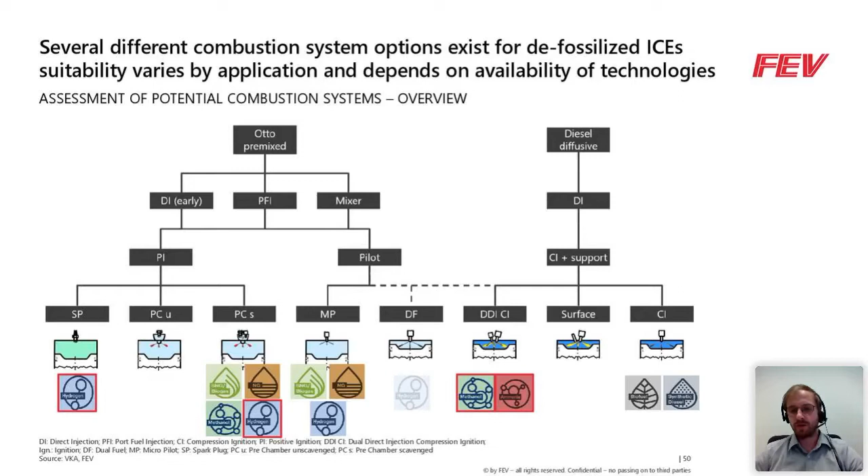And then what we also see very likely on the diffusive side are methanol and ammonia with a pilot-assisted diffusive combustion system. We are in this session going to focus on hydrogen on the positive ignition side mostly, and then also we will start with a section on methanol and ammonia for a diffusive combustion system.

For this purpose, we are starting with the fuel properties, beginning with the fuel itself, as especially ammonia is still quite unconventional as a fuel. Benedict has shown that there are already applications, of course. For example, in the war there was a bus operated on ammonia, and there are some pilot projects. However, I think for most it's still quite unconventional as a fuel.

Starting with the lower heating value, we can see here both for methanol and ammonia, we have a heating value which is roughly only half of that for diesel or MGO. But this lower heating value does not result in a lower energy content in the cylinder. We can see the mixture heating value is even increasing slightly. The main effect is to be seen here for the fuel tank size or fuel volume that we need for a certain energy content. So the storage is not included in these figures here. For methanol, we would need to increase the fuel volume by 130%, and for ammonia, this would be 180%.

Still, for ammonia, the storage density is its major advantage compared to, for example, hydrogen. The additional space that we require is only about 50% of that for hydrogen, and also the temperature for liquefaction at ambient pressure is only minus 33 degrees compared to hydrogen, where we have minus 253 degrees. So therefore, we will also require less insulation or less energy for reliquefaction of the fuel.

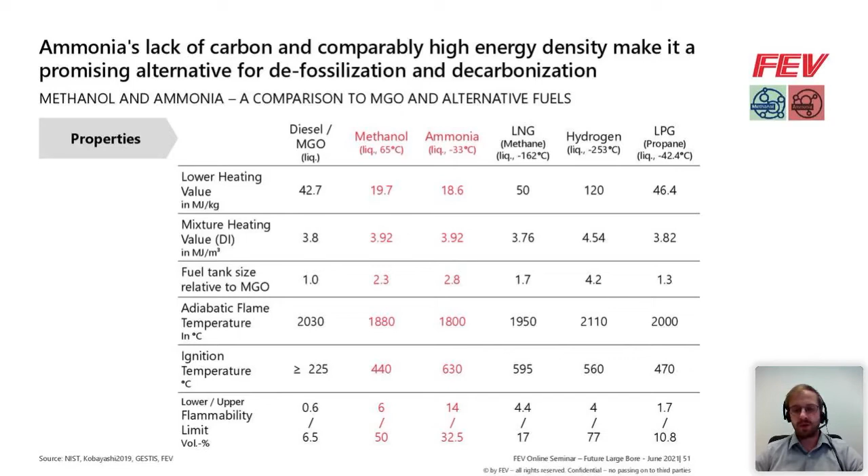Moving on to the more combustion-related properties, we can see here both for methanol and ammonia, we have a lower adiabatic flame temperature, which would be beneficial for our NOx emissions. However, for ammonia, we have to consider that we are burning a fuel that has nitrogen on board, basically. So we are producing nitrogen radicals, which will be worsening our NOx emissions quite severely. And then the ignition temperature and flammability limits: ignition temperature is higher for ammonia and flammability limits are very narrow. So there will be major challenges regarding combustion. We are going to have a closer look at this on the following slide.

For that purpose, we have depicted here ignition delay times and flame speeds. We are starting with the ignition delay times. In dark blue, we have depicted methanol. In light blue, it's methane, as a reference for natural gas, a quite knock-resistant fuel. In gray, we have ammonia. And in red, we have dimethyl ether as a reference for a diesel-like fuel.

If we look at methanol, we can see with a little bit of pilot support, so a little elevation of the temperature level, we are already getting close to diesel-like ignitability. So this is quite a good option for such a diffusive combustion concept. Looking at ammonia, however, we can see the ignition delay times are even longer than they are for methane. So therefore, we will require a lot more pilot fuel or a higher compression ratio, or a combination of both.

Looking at the flame speeds, we can also see in comparison to methanol or methane, the flame speeds for ammonia are about 6 times lower. So therefore, we will also have to make sure that we have, during our diffusive combustion, a quite high temperature level to ensure a full and complete combustion of ammonia, as from the fuel side itself, it does not really want to burn that well.

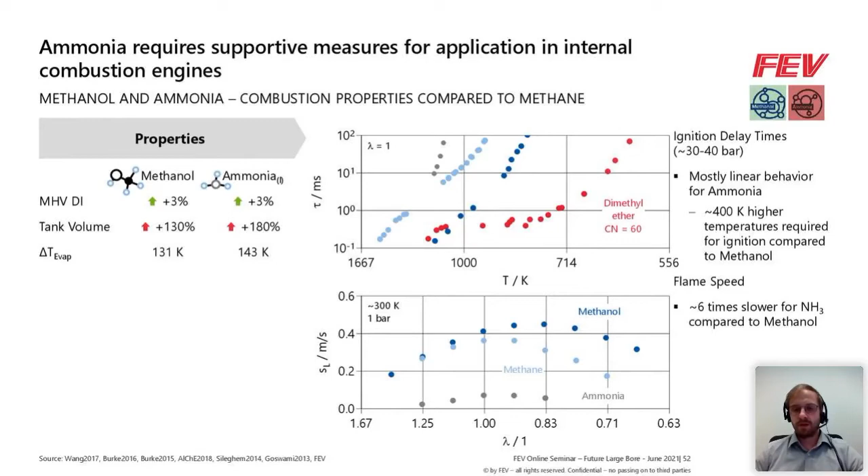Coming from the fuel properties, we can now have a closer look at the diffusive combustion system that we are actually aiming for with these two fuels. As the pilot-assisted combustion system may be unfamiliar to many people, we've depicted it here in 3 phases.

We are starting with the pilot injection. The pilot injection is from this first picture to the second one, being compressed to ignite. Then we have the pilot combustion in the second picture, and we can also start the main injection of our fuel, so ammonia or methanol. This main fuel is then compressed to ignite, supported by the elevated temperature that we are creating with our pilot diesel injection.

And then subsequently it's compressed to ignite, has a main combustion phase, and burnout of course. So really operating like a true diffusive combustion system, but with basically two direct injections and also two compression ignitions.

So what can we say already on this combustion system, just coming from the fuel properties? We've seen this on the ignition delay time. The pilot quantity for methanol will be much lower than for ammonia, and for methanol we had a quite comparable ignitability with a little bit of support compared to diesel-like fuels. So therefore we can mostly take over the combustion chamber here and also the compression ratio, while for ammonia it's likely to be a little bit higher.

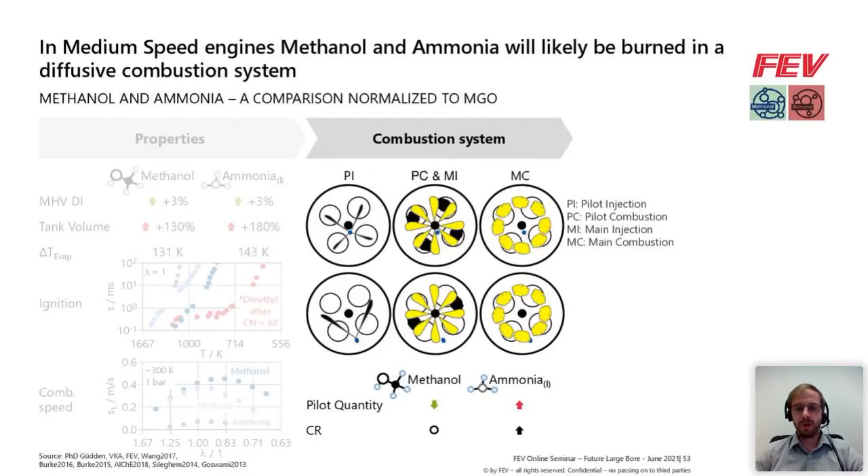What is basically the outcome of this regarding performance and emissions? So we have a short overview here of this. The baseline is the MGO, or diesel basically. So as with methanol, we have the same compression ratio, we can realize basically a similar load range with similar efficiency.

We have a severe reduction of the NOx emissions due to the lower adiabatic flame temperature, but also due to evaporative cooling of methanol. And then the rest of the emissions are basically very low, as we have a diffusive combustion system.

For ammonia, on the other hand, we require a higher diesel share, and maybe a combination of a higher diesel share with a higher compression ratio. So load range will be somewhat limited, and also efficiency is suffering a little bit from the early pilot injection. So this is thermodynamically, of course, not really ideal.

NOx emissions are increasing as we have fuel nitrogen, although the combustion temperatures are lower. But the major advantage of ammonia, obviously, is that we are inherently CO2 free. So CO2 emissions are only produced from the pilot injection.

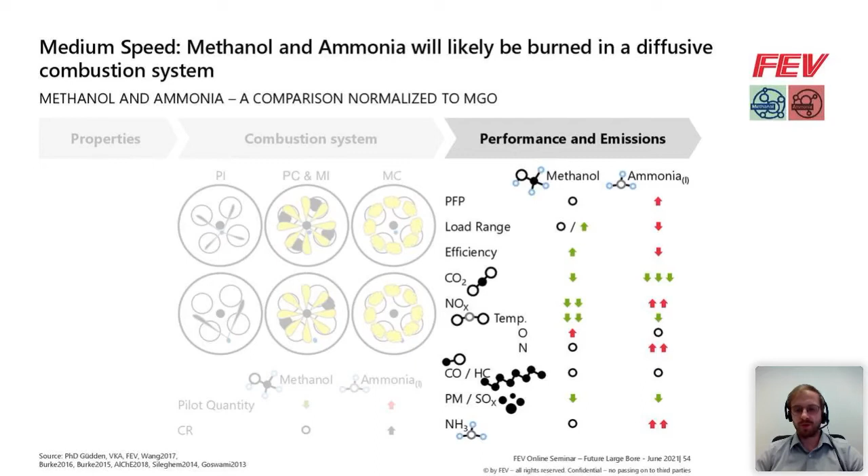So we are going to have a little bit closer look on this combustion system, with a few results from our testing on single-cylinder engines with methanol, and we are going to discuss a little bit what this could look like for ammonia as well.

So we are starting with a plot of the rotational speed over the bore diameter. This type of combustion system is maybe familiar to you from MAN's ME-LGI low-speed engines, or from Wärtsilä's gas diesel engines, which are operating with a similar principle.

And we have, with our single-cylinder investigation, scaled this combustion system to heavy-duty and high-speed engines. The major challenge for such a combustion system, as we have two fuels and two compression ignitions, is of course the time frame that we have for our combustion. So therefore, higher engine speeds are really a challenge, and we have scaled this to these smaller engines, but we feel confident to apply it also to at least the smaller medium speed engines.

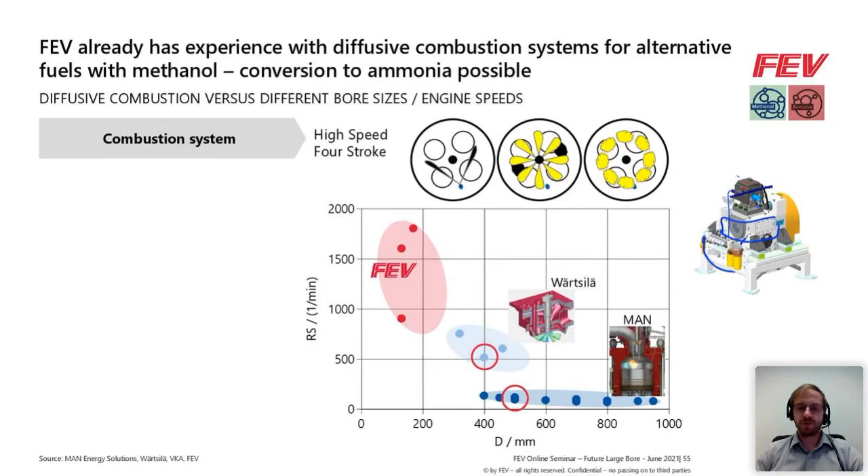So looking at results, we've selected to show here something on the heavy duty single cylinder engine. Of course, the size is much smaller than for the medium speed engines, but as mentioned before, it's really a diffusive combustion system, and therefore scaling regarding the engine size is not that much of an issue.

So starting with the results here, as mentioned, these results are on methanol, but we also have a direct comparison to a diesel baseline. So we can see here at first, even with EGR that we are operating the engine with for the heavy duty, we have a completely soot-free combustion.

So this might also be interesting for medium speed engines, especially with two-stage turbocharging, as we don't have to worry about soot impacting the compressor wheel. So this might also be an enabler for EGR combustion systems for some medium speed engines.

Then regarding HC and CO emissions, we can see we have a very low level, apart from the very low NOx emissions where we have a lack of oxygen basically. So we have really a true diffusive combustion system, and at the same time we can increase the efficiency with this type of combustion system by about 5%, while NOx emissions for methanol are reduced by about 60%.

So considering the properties of ammonia, a compression ratio in the range of 18 might be really the borderline of what we can go for, and we have to increase the pilot quantities. So therefore, efficiencies will most likely go down to the level that we see from the diesel engine, or maybe a little bit lower. But there will of course be ways to further improve this once we are really getting into this.

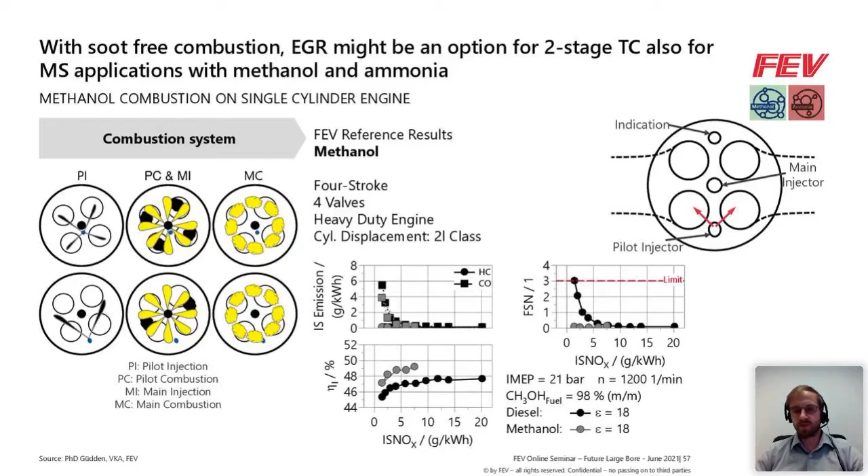So now we've focused quite a lot on methanol and ammonia, and it's time to move on now to hydrogen. We've said in the beginning that we want to focus also on hydrogen, and for that purpose we are actually going back to the matrix that we've shown initially and are going through the combustion systems in a little bit more detail.

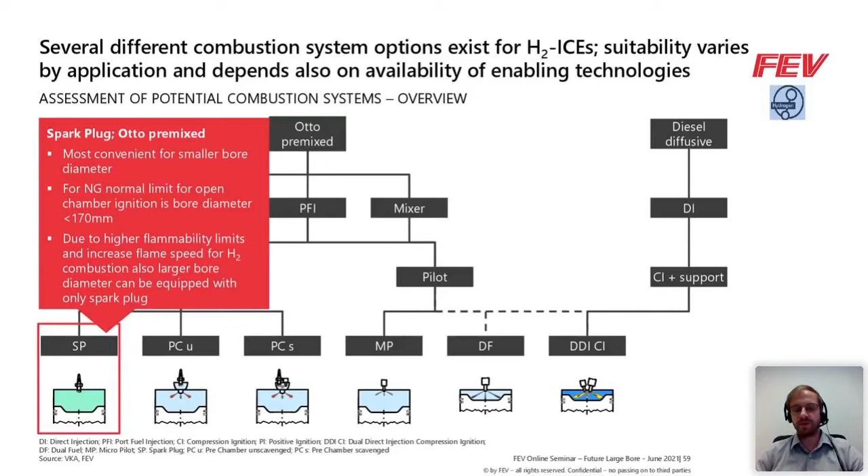As stated in the beginning, for the hydrogen internal combustion engines, we see the possibility for the smaller medium speed engines to also go for an open combustion chamber, as we have a much higher flame speed compared to natural gas. So this is basically shifting the limit for an open combustion chamber. But flame speed is not infinite, so therefore pre-chambers will also have their place for the hydrogen internal combustion engine.

For natural gas, usually a limit is somewhere in the range of 170 millimeters. For hydrogen, we think it could be somewhere in the range of 250 millimeters. For some applications, maybe a little bit smaller. For others, maybe a little bit larger bore diameters.

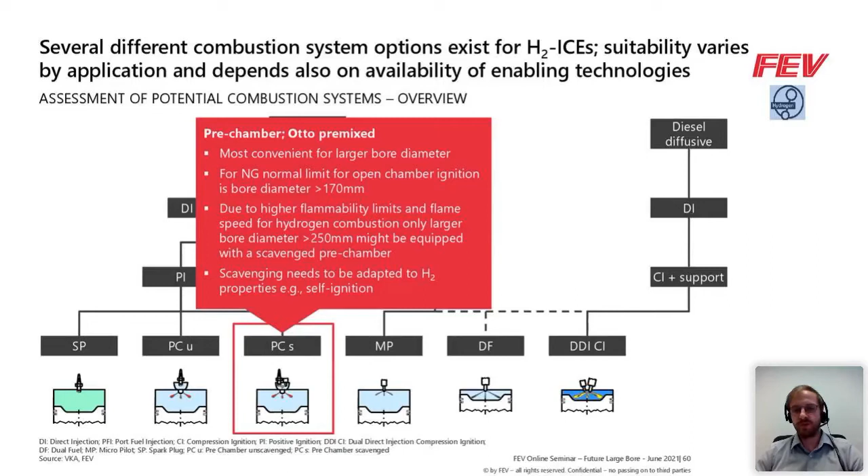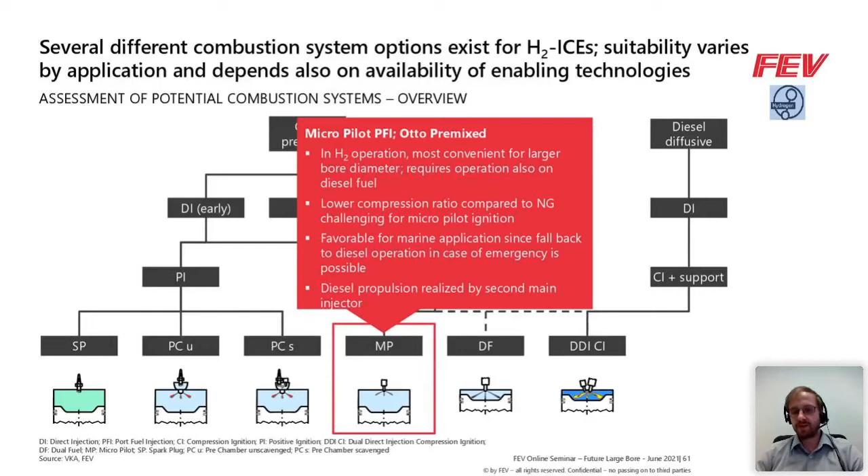Then the micropilot concept might be a very good option also for hydrogen, as it is already a very good option for natural gas. And we can realize a fuel redundancy with a second main diesel injector, which is of course beneficial, for example, for marine applications. However, for the micropilot concept, we have to think about the compression ratio, as if we need to go down for hydrogen to avoid knocking combustion with the compression ratio, we have to be careful that we still can realize a good ignition quality of the micropilot.

Then the DF or fuel sharing concept, we've mentioned that in the beginning, this might be an option for the hydrogen combustion engine, as we don't have the issue that is associated with such a type of combustion system with HC and CO emissions. But this is, of course, just then the entry to the hydrogen internal combustion engines.

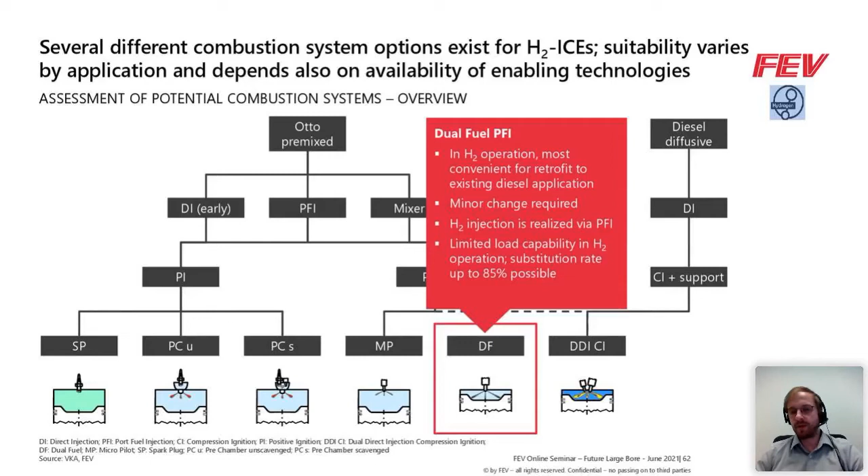Regarding diffusive combustion, we don't see this at this point as very likely for hydrogen, as we require a high injection pressure, so above 300 or 400 bar. Therefore, we would require a compressor or a cryogenic pump to really realize this with hydrogen, and we think it will be more in the direction of positive ignition or micropilot ignition for that reason.

On the positive ignition side, we are going to have a short look at some of the results from our heavy duty and medium duty engine testing. Of course, much smaller, and scaling is not as easy as for the diffusive combustion system. But this slide is really summarizing the main challenges that we have with the hydrogen internal combustion engine.

So on the left side, we have heavy duty results, which are comparing direct injection and port fuel injection. We can see we have a really severe reduction of the boost pressure demand for the direct injection. This is why hydrogen engines will most likely go for direct injection, at least in the longer term, as we really have a lot to gain regarding the boost demand here.

However, this comes with a downside. We can see here on the NOx emissions and also on the efficiency, the NOx emissions are much higher and efficiency is lower for this operation strategy. So we have operated with a boost pressure equal to the back pressure.

So therefore, the mixing is really suffering with the direct injection, as we are having a low pressure direct injection, in this case around about 15 bar. And mixture formation optimization is the key to basically meet the full potential for the direct injection, that we not only have the benefits regarding the turbocharging or the boosting, but also that we are meeting the PFI layout, and that we can then translate the benefit regarding boosting also into higher efficiencies.

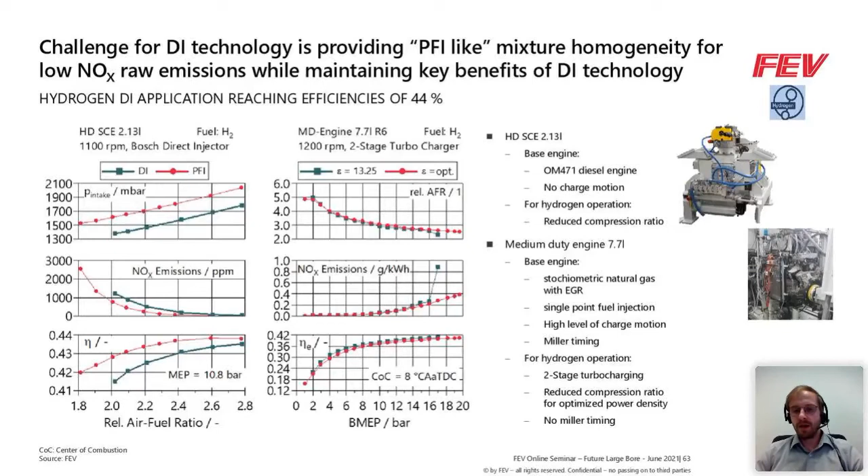So in comparison to a natural gas baseline, we maybe reduce it a little bit to have more room regarding knocking combustion. For that purpose, we utilize a comprehensive toolchain from 0D to 3D that we've also validated with our test results.

So we are starting 0D with a kinetic entrainment model to optimize the compression ratio. Then on the 1D side, we have valve timing optimization and turbocharger optimization on a full engine. And then of major interest, which we are going to focus on a bit more in the next two slides, the 3D CFD mixing simulations, which is especially important for direct injection.

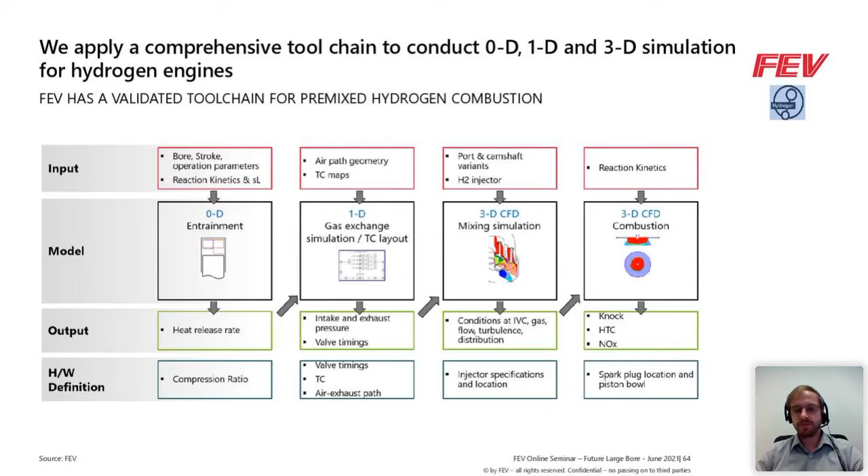But we also do 3D kinetic simulations, so combustion simulations, which can also serve as an interface to engine mechanics and so on. So as mentioned, focusing on the mixture formation, this will actually be the last part of my presentation, and then I will give it over to Max.

We are seeing here three different cases for the hydrogen direct injection engine: central direct injection, which might be a valid option for the smaller medium speed engines where we are igniting the mixture with a spark plug, and where we could be able to place a spark plug and injector in the central position; and then two side injection cases. For pre-chamber layouts, for example, it will be very challenging to fit both a pre-chamber as well as a hydrogen direct injector in the middle.

In the case of side injection, one time we have it without swirl and one time with a swirl number of 1.5. Starting with the central injection case, we have a quite uniform distribution around the center axis. And if we consider that we might be able to ignite the mixture also in the middle with a spark plug, this could be a beneficial solution.

For the side injection cases, we have severe challenges for the mixing. We can see also that charge motion, so swirl, is not having a major impact on this. Therefore, the optimization of the spray formation, of the spray targeting, but also of the interaction with the piston is really important. We can see we use the piston to redirect the spray here. These are, of course, not the optimized solutions, but just examples, so there is a lot of potential that we can utilize with further optimization.

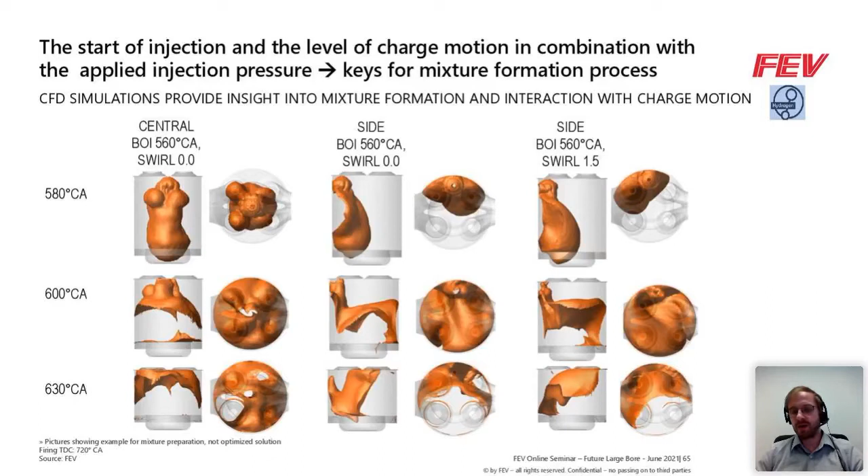Finally, having a look at the mixture formation at spark timing, we can see in the central case, we have in the compact bowl of the heavy duty engine a richer concentration, which is beneficial for a fast combustion speed, while we have major stratification in both side injection cases, which would result in slower combustion, but also higher NOx emissions, as somewhere we will also have quite rich spots.

So therefore it's really very important for a hydrogen direct injection engine to utilize the full potential. For that purpose, it's very important to have a validated spray model to, for example, as shown on the right side, also be able to predict the interaction of the injection with the charge motion and so on very well.

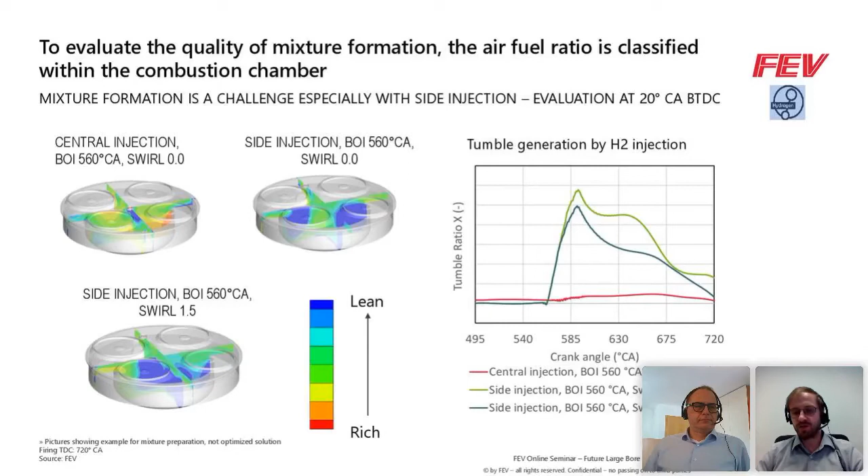Many thanks, Arne, for that compact overview of the thermodynamic background. Now we come to the translation of this thermodynamics to engine hardware. As we can see here, methanol and ammonia can generally be seen in their behavior and requirements comparable to diesel. Especially ammonia needs even higher compression ratio and peak firing pressure capability. Hydrogen and natural gas benefit from higher boosting.

For hydrogen, we see a spark-ignited combustion with a lower pressure for direct injection. For the diesel-like combustion systems for methanol and ammonia, SCR will still be needed. For hydrogen and natural gas, it will depend on the legislation to be applied if and which EATS will be needed.

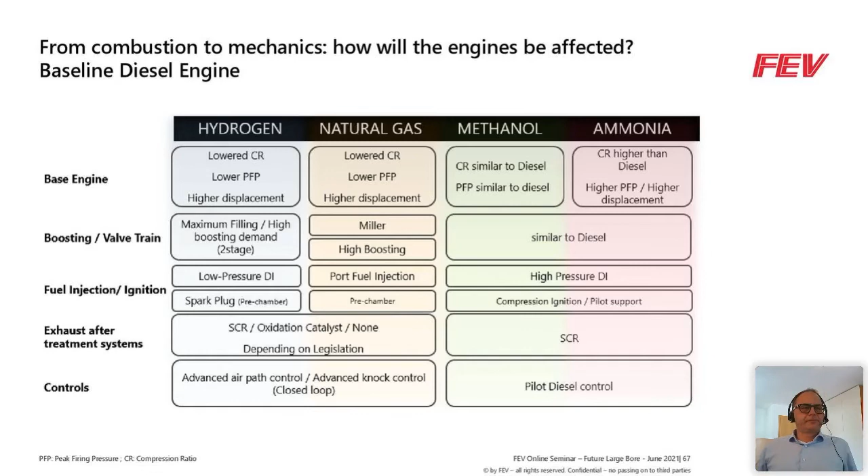So to step into more concrete detail, I would like now to show how existing dual fuel engines using natural gas and diesel as fuels are already a very good basis to also burn hydrogen. What is needed is shown here on the right side. The example is taken from a normal dual fuel engine, and what should be changed if we want to run on hydrogen is the compression ratio, because we have a higher knocking tendency.

Also, the induction system needs hydrogen-adapted valves and a hydrogen-adapted fuel supply. The SOGAV needs adaptation for the lower volumetric heating value, and of course also the turbocharger, for the increased boost pressure demand due to the lower volumetric heating value of hydrogen.

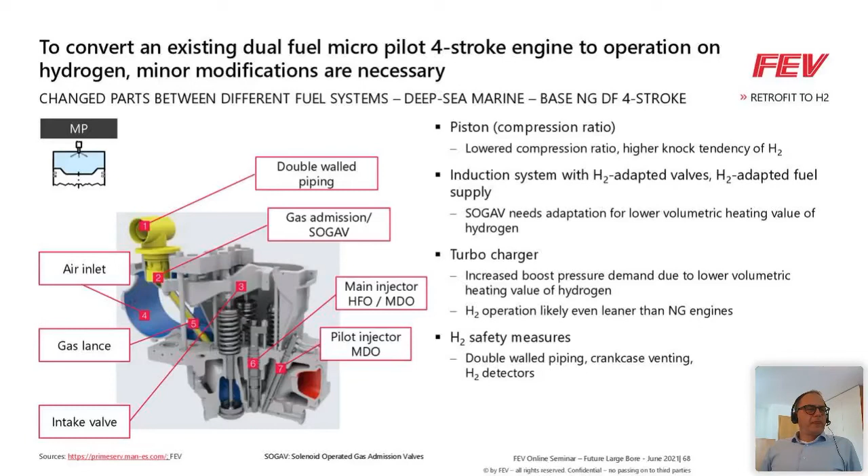What also has to be considered is that hydrogen operation is possible with even leaner lambda values, leaner fuel ratios. Of course, we also have to consider safety measures for hydrogen: double wall piping for marine application, which is already usual, has to be considered, along with crankcase venting and hydrogen detectors.

From today's perspective, future engines should be able to run on different kinds of conventional and alternative fuels, as we can see on this matrix here. It will be beneficial if engine architecture in general, and cylinder head architecture in particular, will be able to cope with that in an efficient and modular way. As we can see here,

we see methanol and ammonia with diffusive combustion will have a setup very similar to diesel engines. When we come more to the alternative fuels, burning hydrogen, we see that it will also come to scavenged pre-chambers, especially on bigger bore sizes, comparable to natural gas burning. And we also see premixed burning combustion systems for methanol, also with scavenged pre-chambers.

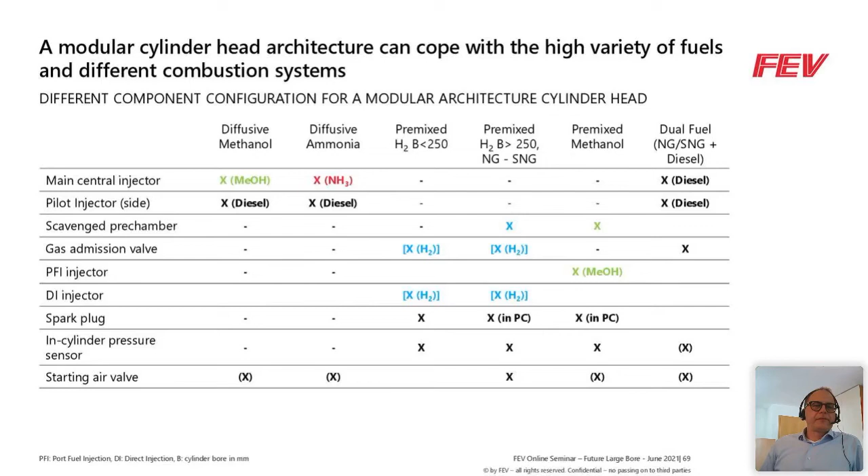So to show this better, we have here different mock-ups of important elements to be implemented into the cylinder head, which are needed to operate on different kinds of fuels. We start here with a normal diesel system mock-up, which is relatively lean and easy compared to what will be necessary to run on other fuels.

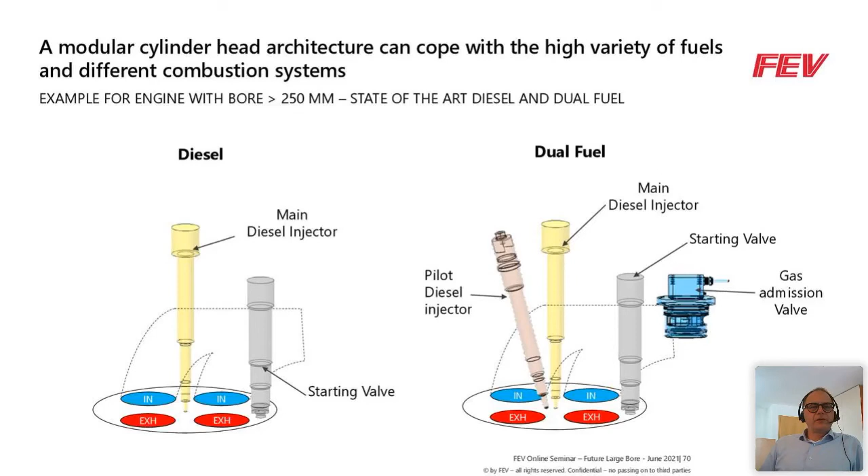On the right side, we see the dual fuel mock-up, where we have already added a pilot diesel injector and where we also have a gas admission valve to get the gas into the intake channels, the intake ports.

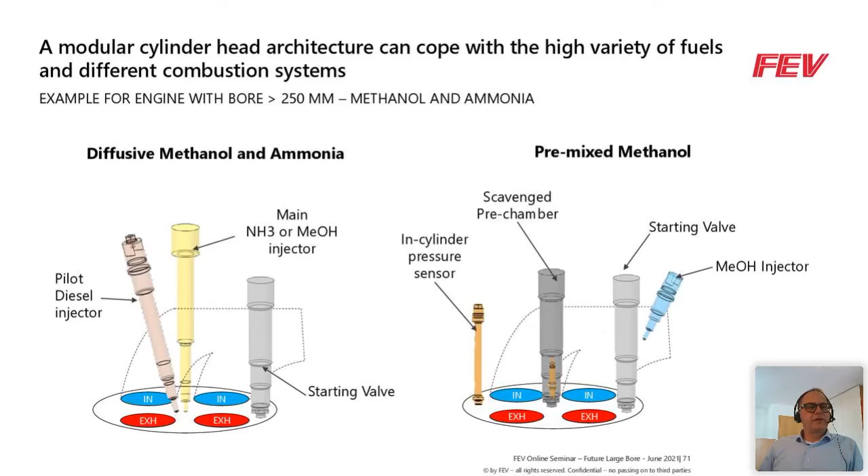Premixed methanol running on a scavenged pre-chamber is shown on the right side, where we also see that we will have in-cylinder pressure sensors as a feature necessary for serial application of these engines, because we will need closed loop combustion control. And as we can also see here, the methanol injector is placed on the side to inject the methanol into the intake channels.

Now we come to this premixed hydrogen direct injection. We see here that additionally we have to place the direct injector somewhere in the cylinder head for the H2. Still, we have the scavenged pre-chamber. And on the right side, we see the alternative, which runs with a gas admission valve on the intake system.

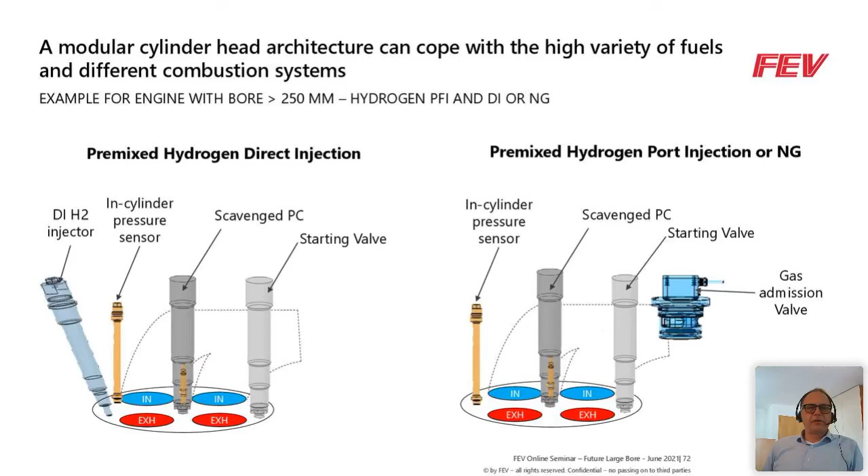But as we saw before, for larger engines, we think that we have to run on direct injection. So, as we already mentioned several times, direct injection of these alternative fuels will play a significant role.

In this slide, we want to show how the combustion of methanol, ammonia, and hydrogen, and also the effects of burning these fuels, will differ compared to diesel combustion. On the lower part of the table, we point out the challenges we will face by operating these fuels. As we can see, compared to diesel, methanol will have decreased lubricity, increased corrosivity, and also a higher tendency for cavitation.

Similar tendencies, but even stronger, are expected for ammonia. And concerning the lubricity, we have this also for hydrogen. And for hydrogen, we also see that embrittlement will be a topic.

As challenges or general tendencies, we see that because of these challenges described here, with needle impact, cavitation in the nozzle, and pressurized leakage, we will have reduced injection pressures. So we expect injection pressures in a range of 700 to 1000 bar, depending a little on the fuel.

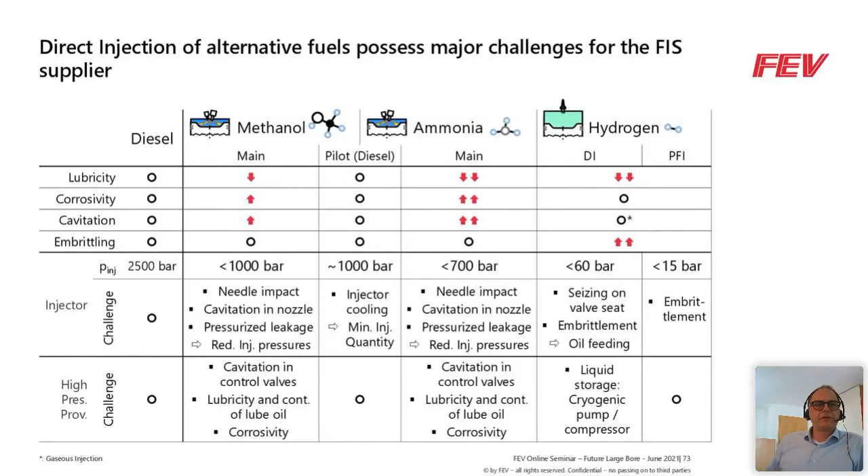So on this slide now, we see that variability in the valve train is something that maybe can support this kind of combustion system, but we do not see it as a mandatory thing. Due to this different combustion behavior and combustion properties of these alternative fuels, in some minor perspective, variable valve train could have some beneficial effects, but in general it should be possible to run with normal, constant valve timing.

One of the reasons for that is that these combustion systems can work with reduced valve overlap, or even require and do not need this variability for larger and smaller valve overlap.

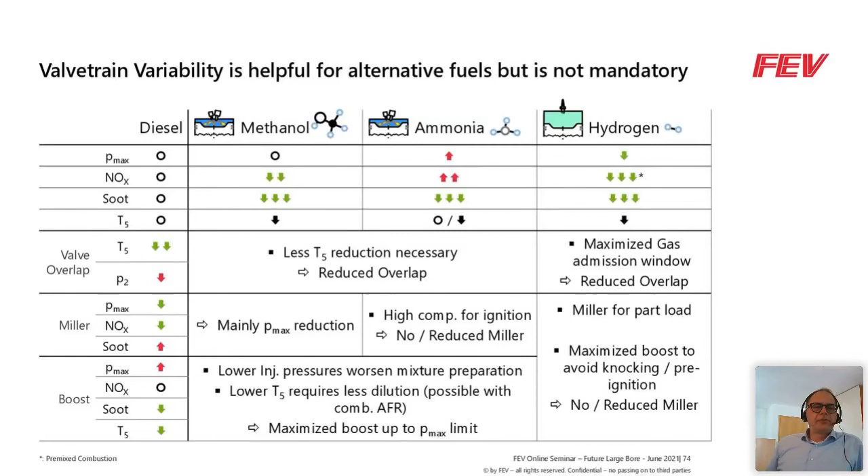A very important point in every new engine layout are the requirements for the boosting system. These requirements are generally related to the chosen combustion system and the combustion system behavior of the fuel burned, which is also influencing the achievable BMEPs.

So what we show here is that, especially as you can see on hydrogen, even with a decreased BMEP level by burning hydrogen compared to diesel operation, we have an increased boost demand. The red bar is always the comparison to the basis from a diesel engine, and we see on the black and aquamarine blue bars how the BMEP and also the requirement for boost pressures behaves relative to that.

As we can see here for ammonia, we will see lower levels which are fitting to each other, lower BMEP levels and also lower requirements on the boosting. Like I already said, for hydrogen we see more and higher demand on the boosting system.

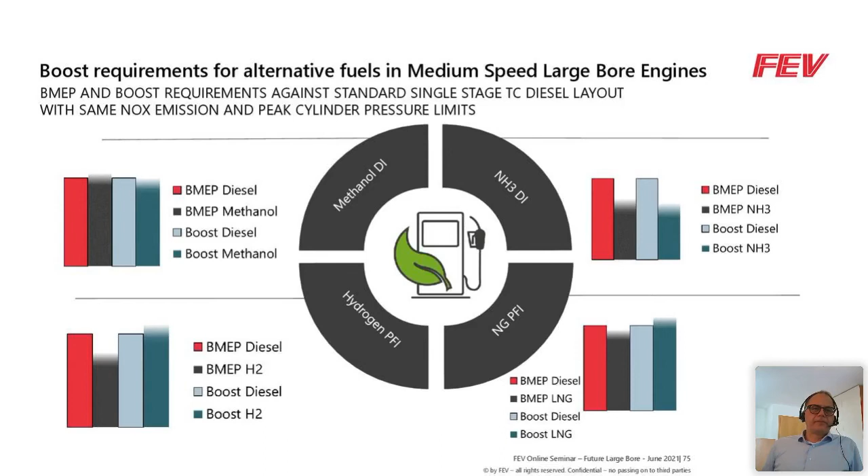Therefore, we have some slides to show the possibilities for different ways to arrange a two-stage turbocharging boosting system. We think that these two-stage turbocharging systems will play a significant role in the future for medium-speed engines, maybe an increasing role, and especially when it comes to the combustion of hydrogen, as we saw before, they are very helpful.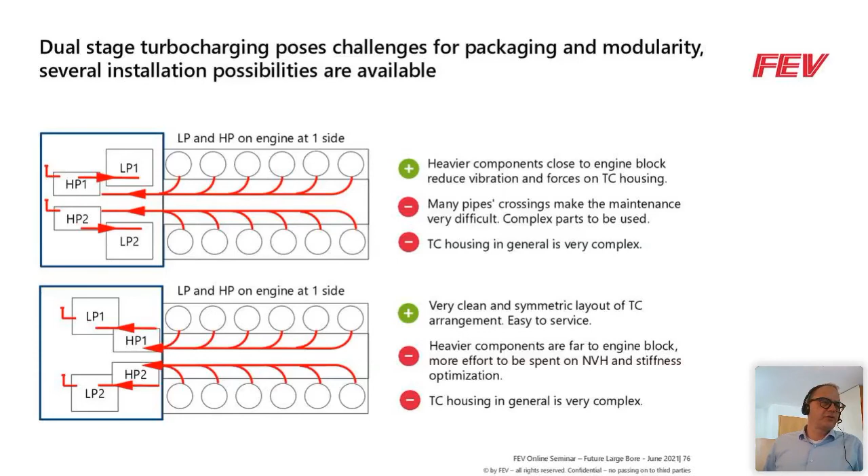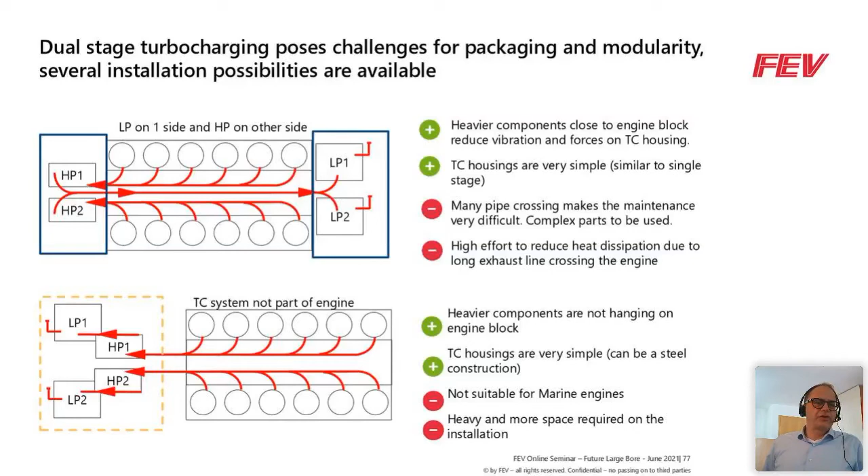I do not want to step too much into detail. I just want to explain that there are some advantages or disadvantages depending on how you arrange the low pressure and high pressure turbochargers. What is clear, and some alternative ways are possible, is to arrange low pressure and high pressure turbochargers on both sides of the engine, on free-end side and coupling side, and also the possibility to arrange a separate unit away from the engine to come out of vibration issues and other negative effects.

Another important topic we saw also from the slides before is of course the possibility to have a variable compression ratio. Therefore I want to show here FEV's possibility to make a connecting rod with the capability to adjust during operation the effective connecting rod length.

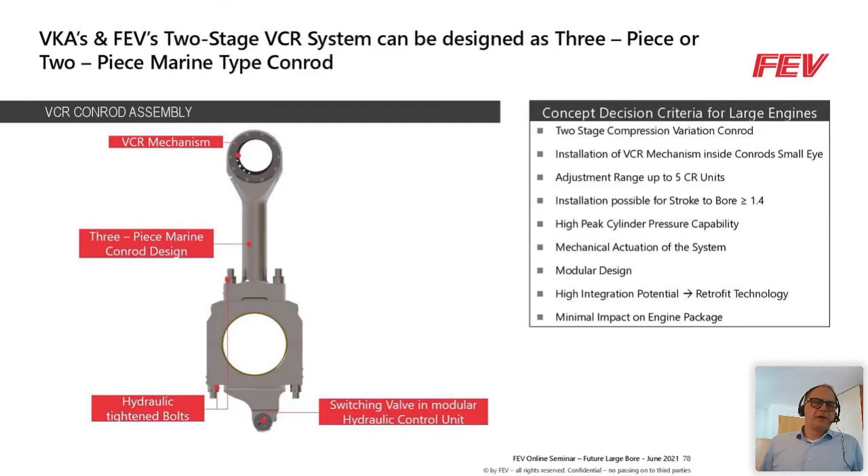This is done in a way that we have an eccentric piston pin bush, which can be adjusted by a switchable valve on the big end of the connecting rod. By switching some different oil flows, this eccentric piston pin bush can move in a certain angle, and combined with this eccentricity, we can change the effective connecting rod length.

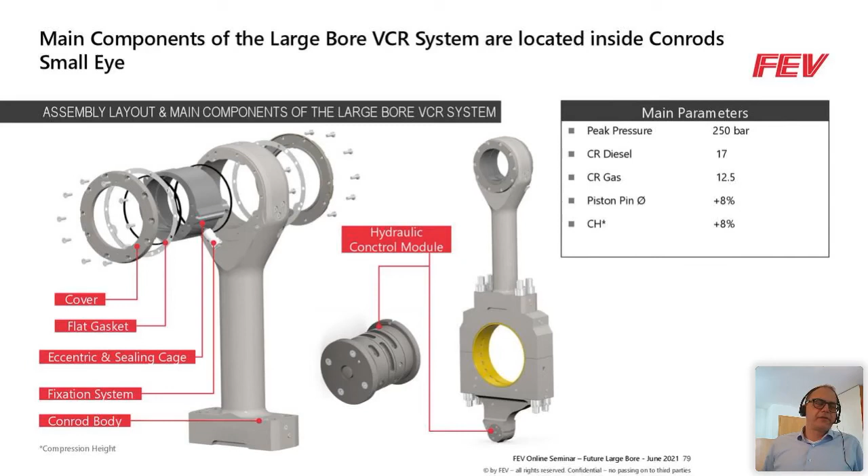Same things can be done when we operate now on alternative fuels. For example, operation on methanol, depending on the load point, it can be beneficial to have a reasonable bandwidth of 16 to 19, which can be realized with a certain eccentricity. And also, when we run on ammonia, we can switch from 19 to 23.

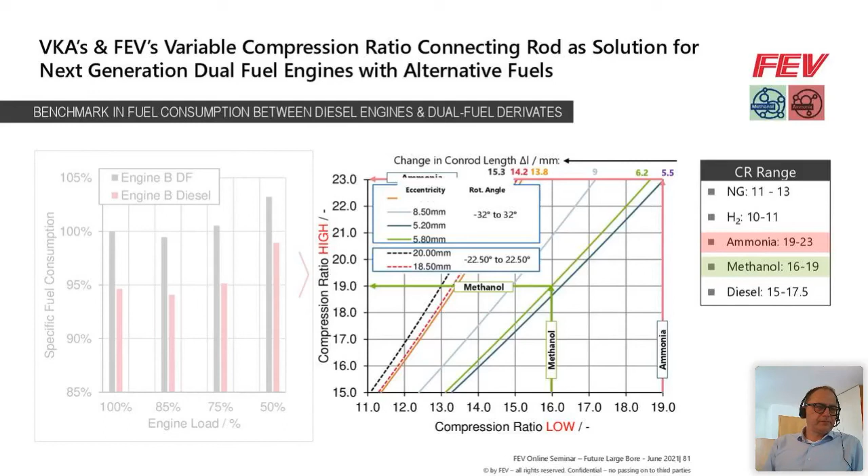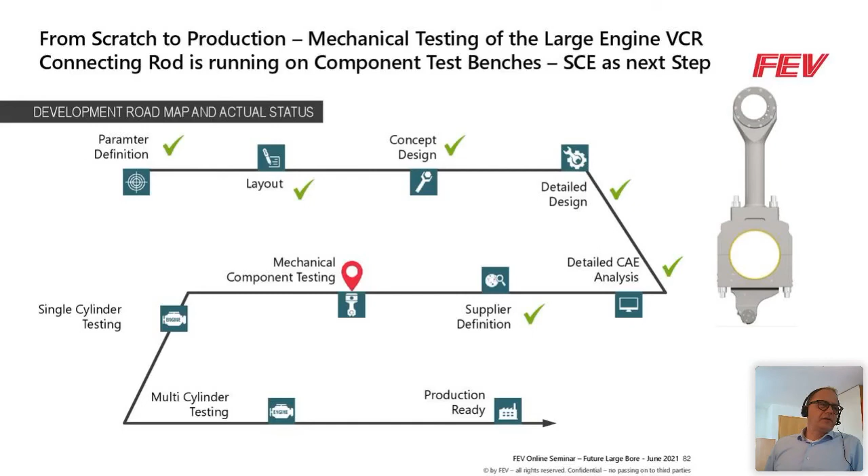The development of this VCR system has already passed some quality gates, and we are at the moment in the mechanical component testing. Of course, a lot of CAE detailed design work and things are already done successfully.

So now, one of the last slides I want to present to you are the general correlations we see with additional pollutants, which we have to deal with when we run on alternative fuels.

What we also can see here is which EATS system we will need. Depending on the regulation we have to deal with, it can be that in the case of hydrogen we will not need any EATS, or we can use a typical SCR system.

For methanol, we have much more things to consider. We can have carbon monoxide, HC emissions. Also formaldehyde can be a problem, NOx as well, and again the particulate numbers.

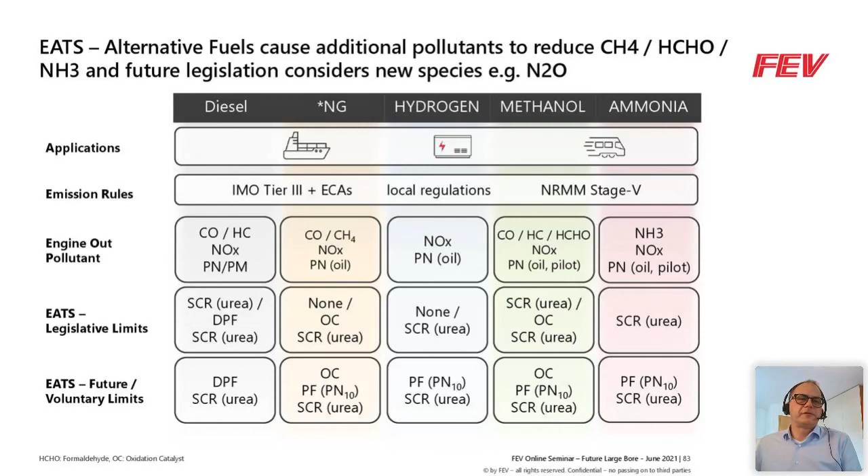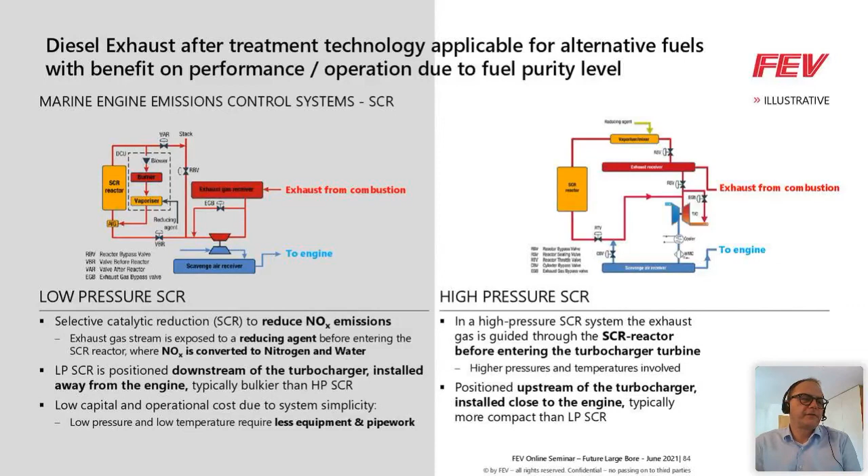We work at higher pressures. We can reduce the required volume of that system, and the temperatures are also at a better level. So in the end, we can achieve more efficient and effective SCR systems, also with respect to requirement of space.

One of the last things I want to mention is the possibility to test catalysts, especially the aging of catalysts coming from oil particles. Therefore, we have a special test bed where we can put oil particles into the exhaust gas stream and test the behavior and reaction of these catalysts when these negative things impact them.

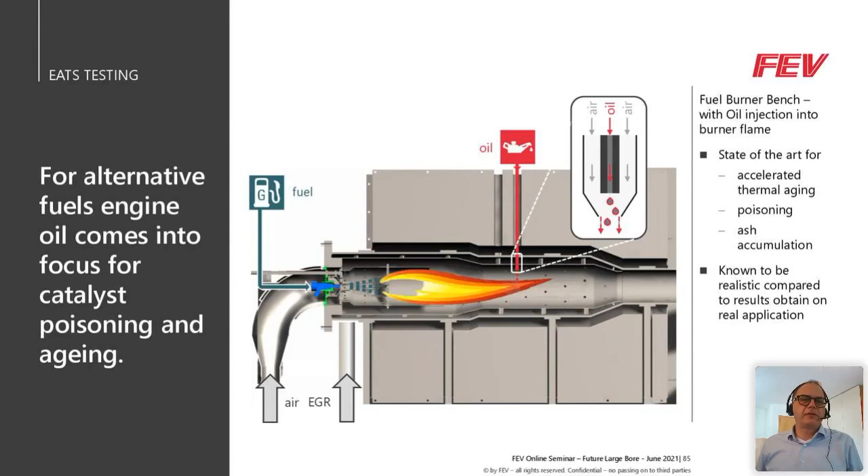One last thing is condition-based monitoring, which will become a more interesting topic as well in the future of these engines. FEV has been preparing condition-based monitoring systems and the logics and so on for some time already.

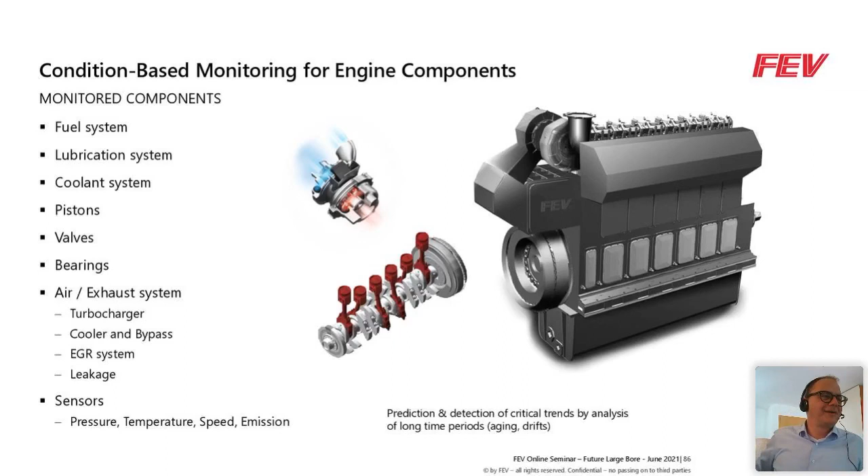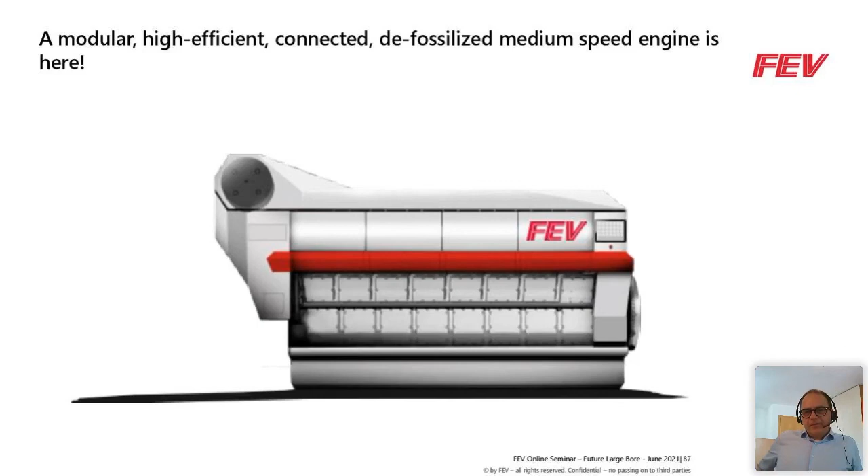I'm now already through with this, and I think altogether with this package, we will see a future of very modular, high efficient, connected, defossilized, medium speed engines. I wish all of you, and also us at FEV, that this future will still take very long time from nowadays. Many thanks, and now I will be open for your questions.